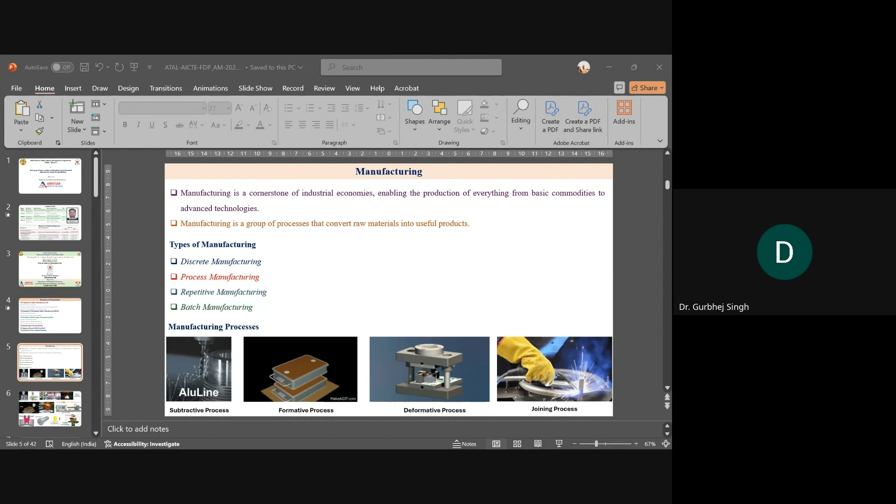And minimum material waste: in additive manufacturing, the material waste is very low compared to conventional. Lower tooling cost, because all processes happen on a single platform, so there is less tooling compared to conventional, and rapid prototyping and faster time to market. Next is cost effective for low volume production. Additive manufacturing is best suited for low volume production, and there's design flexibility. All kinds of objects can be manufactured; we just need to design it and transfer it to printing.

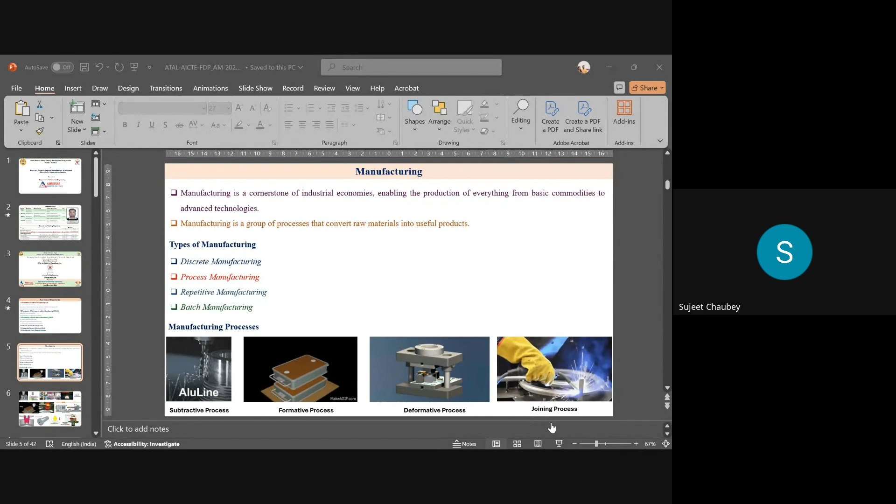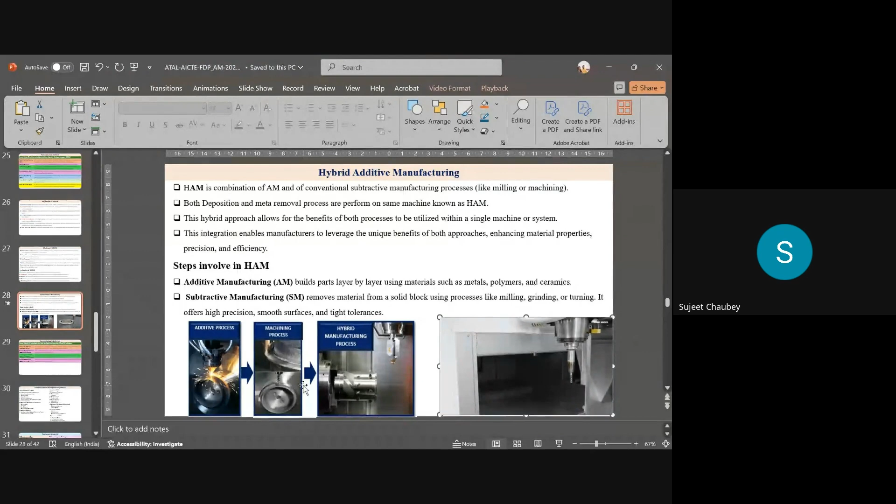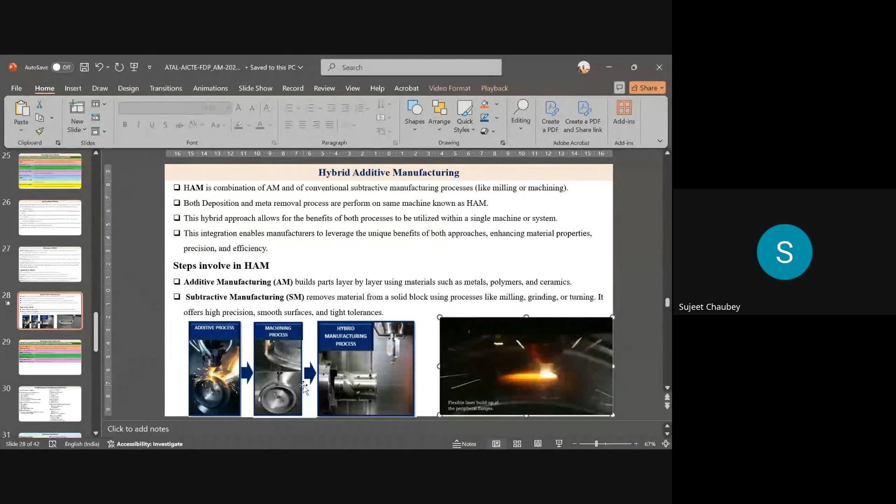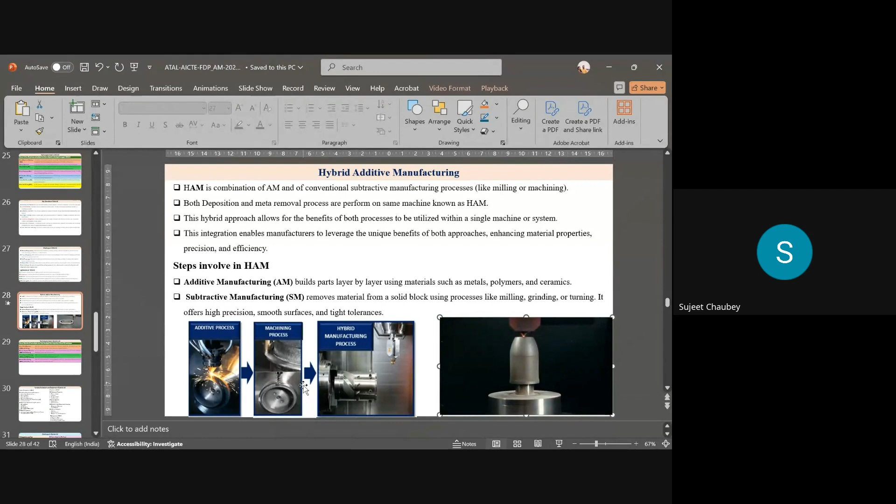And here is a video you can see. This is leveling. This shows multi-material additive manufacturing in combination with the subtractive manufacturing process. After building the object, the next process is machining, so you can see the next step is machining. Both additive and machining processes are performed on the same platform, which reduces tooling and machining setup times. Overall it reduces the total manufacturing time, and thus reduces the cost of the printed parts.

So technology used in hybrid machining process is similar to the additive manufacturing process, which is a combination of subtractive process. Some processes are laser metal deposition with milling. Another is directed energy deposition with the machining process, fused deposition modeling with CNC machining, and electron beam melting with post-processing. So EBM uses electron beam to build high quality parts, which can be post-processed with machining and grinding techniques. So post-processing grinding is used, and CNC machining is used to achieve the precise dimension and smooth surfaces. So these are some combinations of hybrid manufacturing process.

And variable parameter is similar to the additive manufacturing process. Only difference is in this process, additional machining process is used. So other input parameters are cutting speed, feed, tool geometry, and depth of cut. So these are the additional input parameters in this process. And hybrid parameter is the interaction between the additive and subtractive process, and another is heat affected zone. Responses are mechanical properties, surface qualities, geometry and dimensional accuracy, material integrity, and optimization of hybrid additive manufacturing process. So these are just some input parameters and output parameters associated with the hybrid additive manufacturing process.